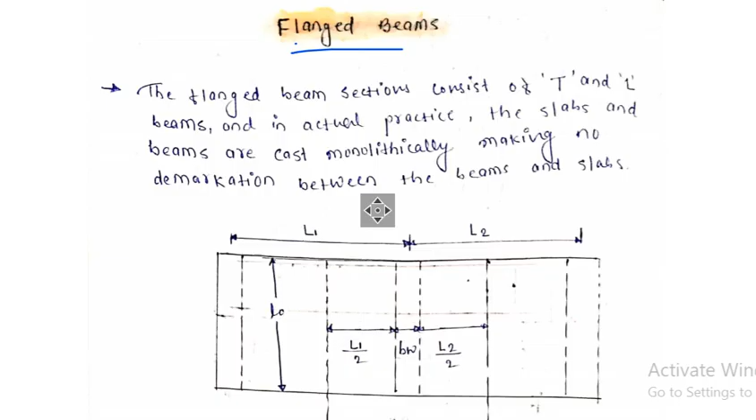So my dear friends, today we will discuss the flanged beam. We have already covered the singly reinforced, doubly reinforced beams and many more. If you have not gone through those, please go watch those videos so you can understand this concept clearly. So without wasting time, let's understand the flanged beam.

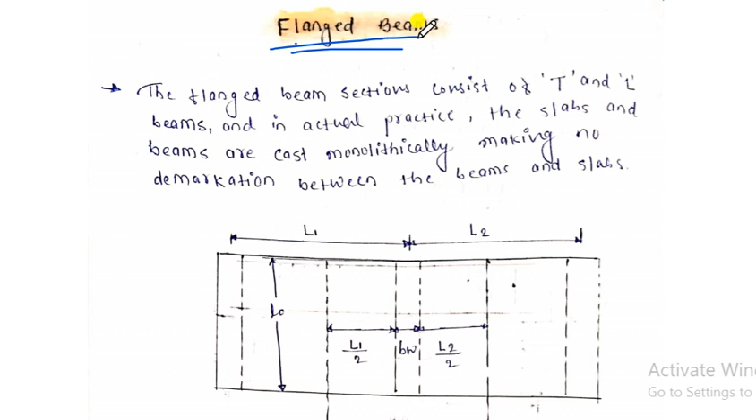Flanged beam - where does it occur? Does it really occur in structures? Yes, my dear friends, it does. So let me show you a figure so it can be easy to understand.

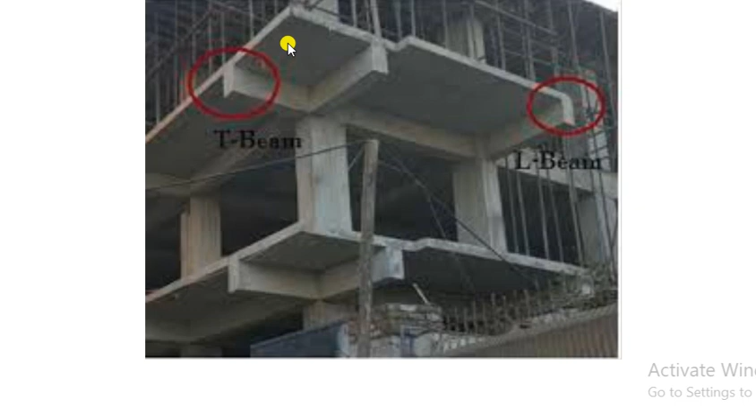At the same time, if you observe the slab at the corner, here the formation of an L beam takes place - L shape of beam. So this is nothing but what we call the flange type of beam. So the flange type of beam consists of T and L shapes.

Mostly the flange type of beam is of T and L type sections, and in actual practice the slabs and beams are constructed monolithically - tied to each other, or constructed jointly. Then there is no demarcation between the beams and slabs. That demarcation is nothing but the flanged beam. So, hope you understand the flange.

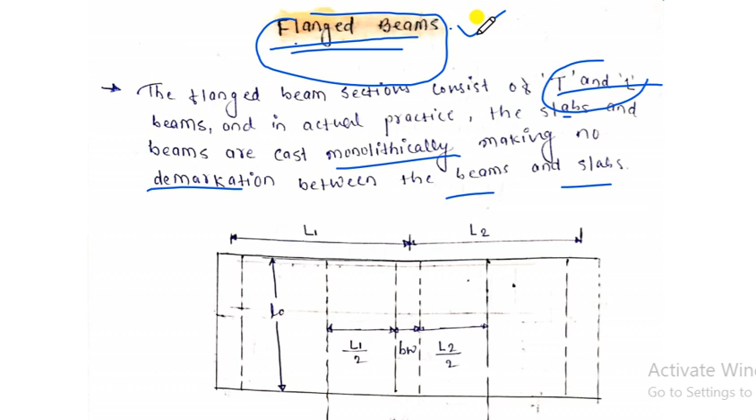So let's see the flanged beam more deeply so you can understand. My dear friends, assume this one is a slab - this is the top view. Suppose this is the top view of the slab - just imagine your slab. So this one is the top view of the slab, and this is the length of the slab, as well as the width of the slab.

Here we have provided a beam at the corners and at the mid span. There may be more beams as required, but for understanding purposes I have kept one beam at the corner, and this is the second beam. Similarly, this one is the last beam, the third beam. Hope you understand these figures - you can imagine these easily.

Yes, this figure which I have shown you is based on these concepts. This one is the upper portion of the slab, and this is the mid span beam. This one is the corner beam, and this one is also a corner beam. So here the formation is L shaped - this is known as L beam. Similarly, this one is known as T beam because it is in the form of T. Similarly, this one is also an L beam, and this one is the mid span beam.

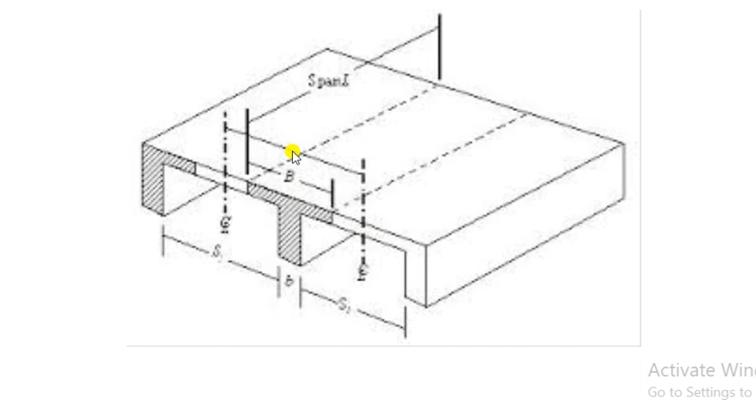So let's see once again. Hope you understand this one.

The length from center of these beams to the center of this beam is L1. Similarly, the center of this beam to the center of this one is L2.

The width of the web, this one is the web, that is bw. bw is nothing but the width of the web, so width of the web is this one.

At the same time, if you need to calculate this area, then it is nothing but L1 by 2. Similarly, this one is also L2 by 2 because the total is L2, so this portion will be L2 by 2.

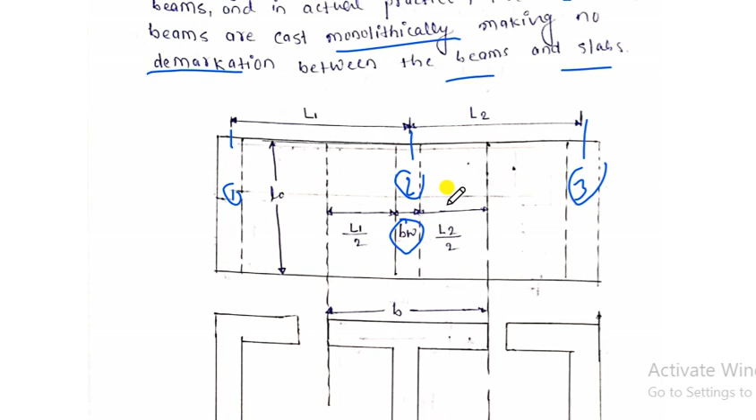So from these ones, I have shown you the figures like these. From these figures, as you can see, the formation of the middle beam, the intermediate beam form—

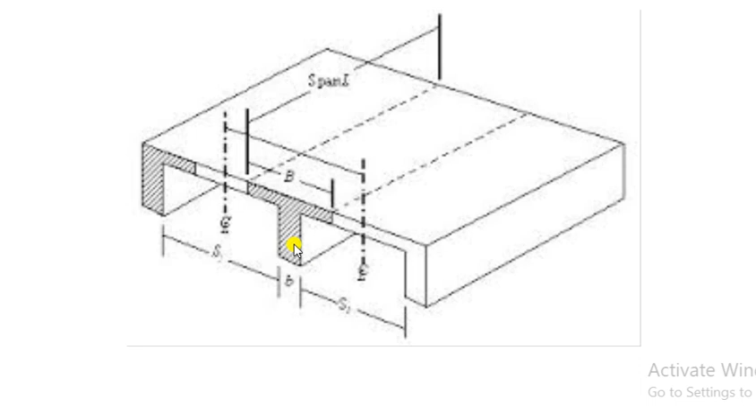Any intermediate beams, there may be multiple beams, that beam forms T sections, and the corner beam forms L section.

So that's why the mid span beam formation is T beam, its actual width is B, and this formation of the L beam, this one is L beam and the corner is also L beam. So this one's actual width is B.

So B is nothing but L1 by 2 plus this one, that is here to here is L1 by 2. Similarly this is BW and this one is L2 by 2. So B is equal to L1 by 2 plus BW plus L2 by 2.

But what happens in the flanged beam, actual width is not taken into consideration. Remember that point always, that actual width is not taken into consideration at any point, so we have to remember these points.

Always we have to take effective width of flange. This is why, because I will tell you the reasons. Let's understand this concept more deeply.

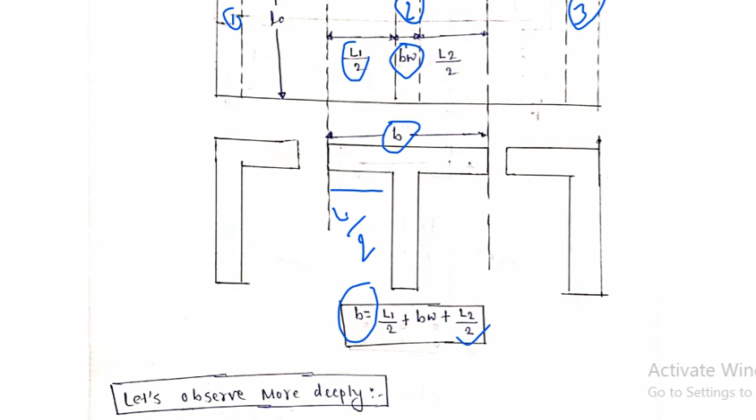Here as you can see, what I did, I have just drawn the above T section here. So the actual width, this one is B, and this one is web, that is BW. I have reinforced 3 numbers of bars at the bottom, and from the topmost fiber to the mid of the reinforcement is what we call effective depth, and this one is the gross depth.

So what happens, just imagine, suppose this one is a beam.

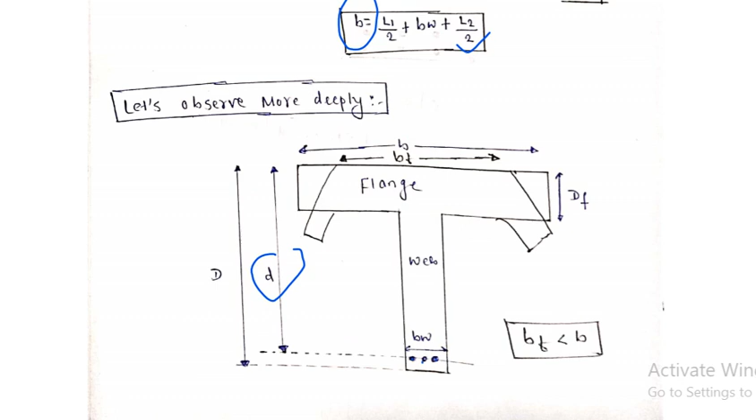So if it is a beam, if I applied the load here, if you applied heavy load here, then there is a chance of failure. Are you getting my point? There is a chance of failure.

So if I applied the load here at the corner, then there is a chance of failure because the support is not given here.

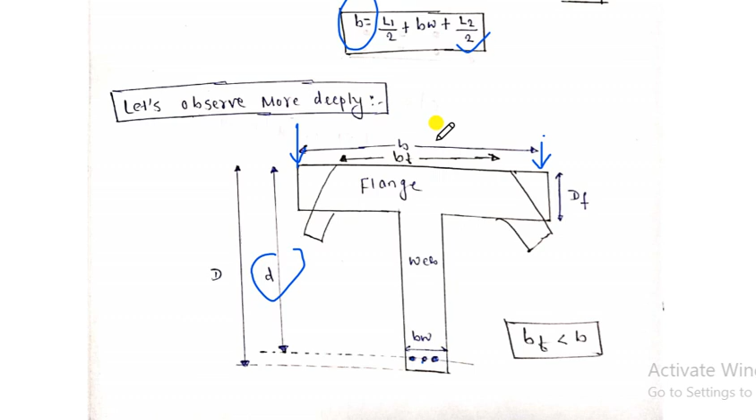So what we do is we neglect the actual width of the beam, and in order to prevent failure, we consider the effective width of beam. So in every design as well as analysis of the flanged beam, we must consider the effective width.

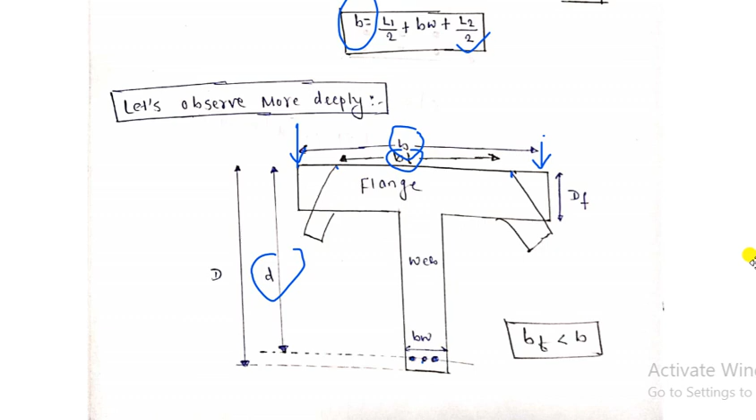Remember, effective width only. So what happens, the effective width is till here, to here. So if we consider effective width, there is less chance of failure. This is why we consider the effective width only in the T beam sections.

So from the IS code book 456, if you go to page number 37, there will be a formula given for the isolated T beam and for the continuous T beam. So for the isolated T beam, the effective width formula is LO by LO by B plus 4 plus BW.

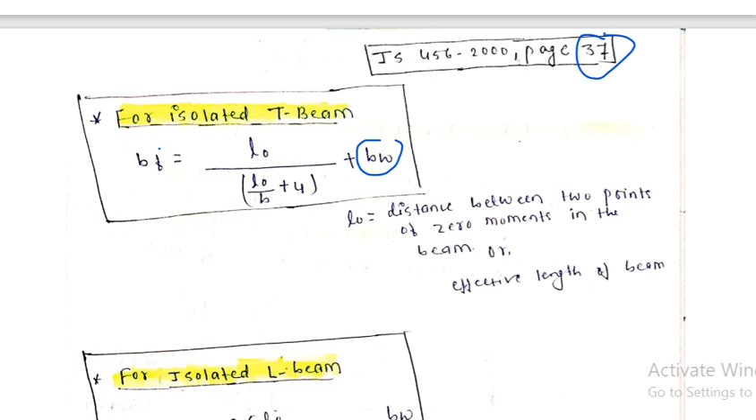Hope you know BW. BW is nothing but the width of web, this one, it is the width of web. So here the 4 is a constant and B is the actual width of flange. Here the LO is what?

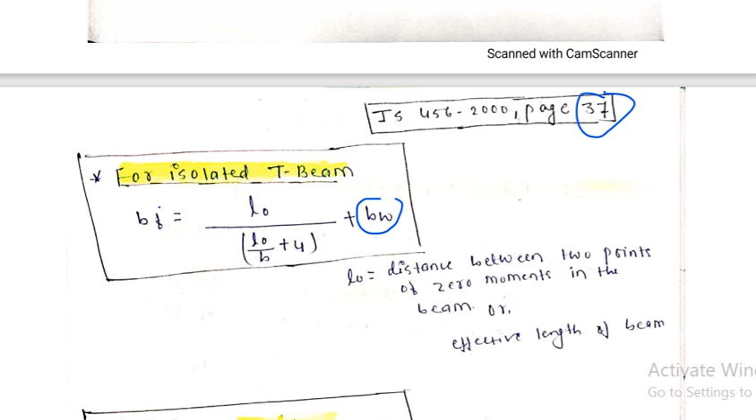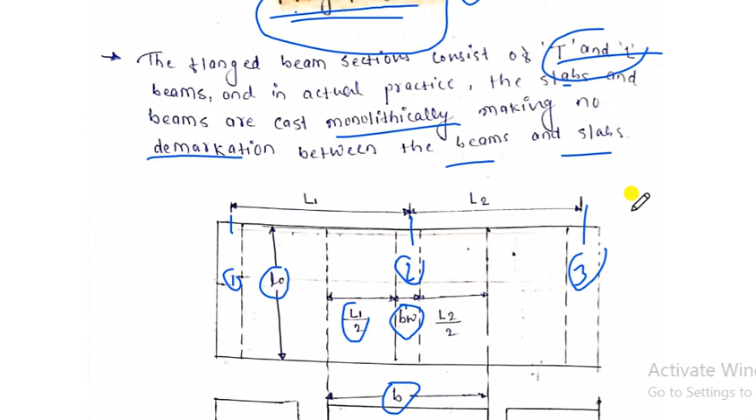LO is nothing but the effective length of beam. Let me show you the first figure so you can understand. These points from here to here, the mid-spans, is nothing but the LO, the effective length of the beam. So LO from the above figure can also be said as the distance between the points of zero moment in the beam.

And hope you know, as engineers you must know what do you mean by zero moment. You should have a clear concept about this.

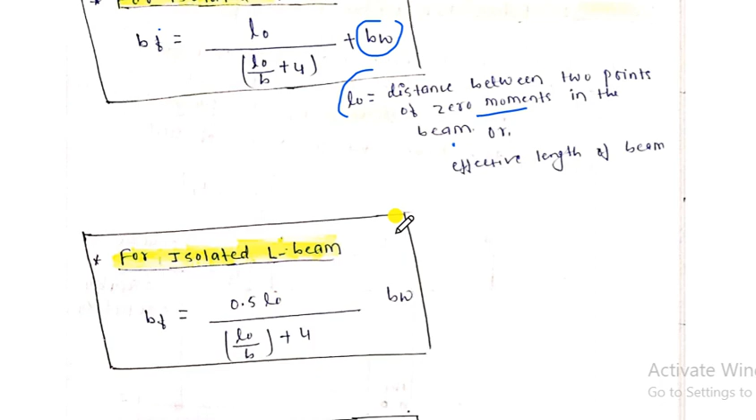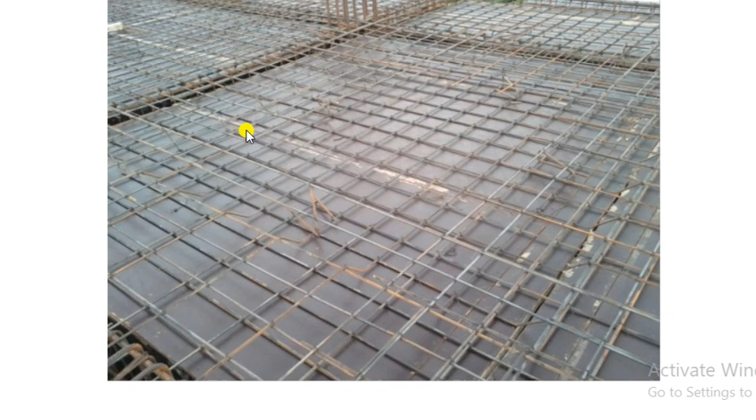So for the isolated T beam, let's understand what we mean by isolated T beam. Let me show you a figure from the side. This one is the beam, and this one is the slab. While concreting, we cast the slab and the beam at the same time, constructing both together. So this is called a flanged beam, or monolithic construction.

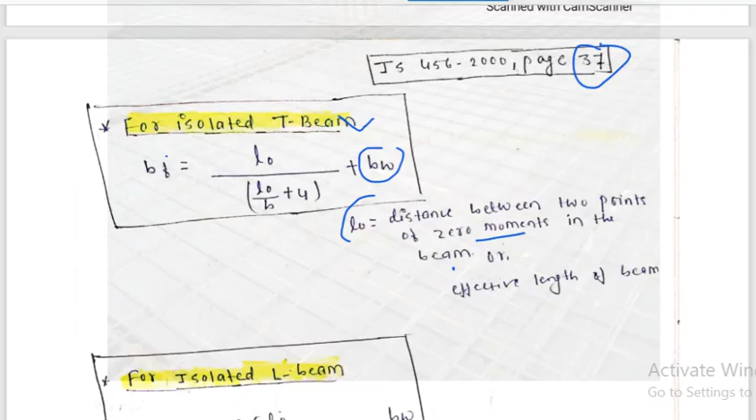But if we construct separately, we first cast the beam, and later we cast the slab, constructing them separately. Such a type of beam is known as isolated T beam, meaning the construction of slab and beam is done separately. So such type of beam is known as isolated beam.

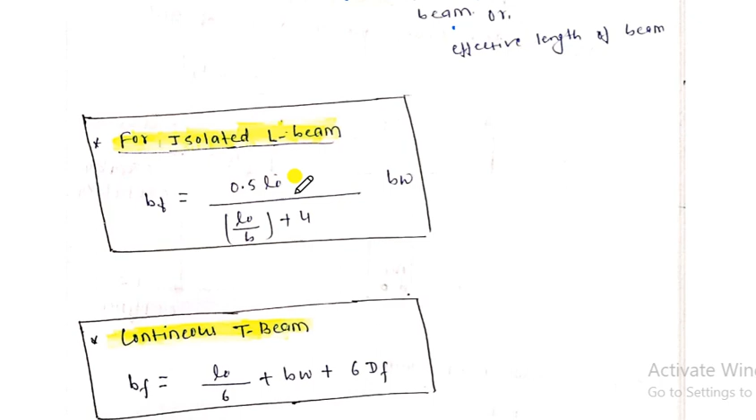And for the isolated L beam, it's just 0.5 LO, using the same formula: LO by B plus 4 BW, where BW is the width of the web, and LO is the effective length of the beam. For the continuous beam, it's LO by 6 plus BW plus 6 DF, where DF is the depth of flange.

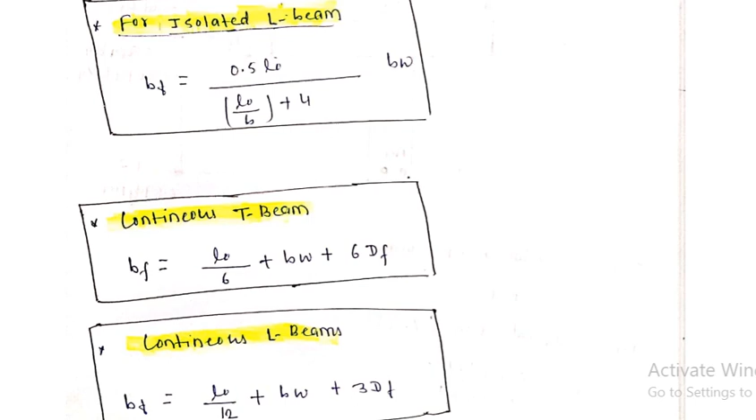So here, from here to here, is the depth of flange, that is DF, taken from this point. For the continuous L beam, it's LO by 12 plus BW plus 3 DF. All these formulas are given in the IS codebook 456 2000, on page number 37 itself.

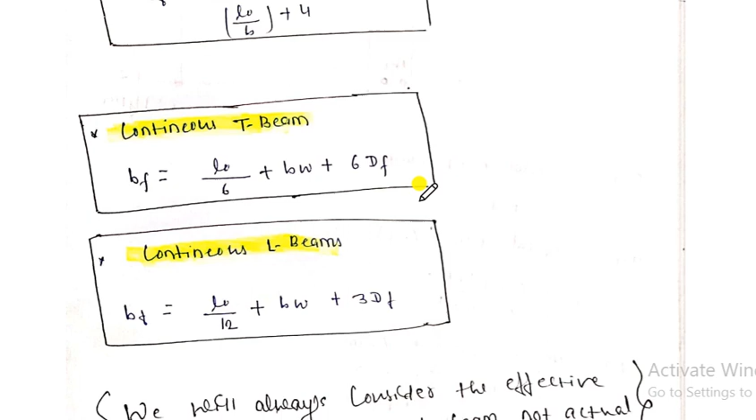So from these lectures, what I would like to convince you is that for the analysis as well as design of the flanged beam, we will always consider the effective width or effective length of the flange, not the actual width, because I have already told you the reasons behind it.

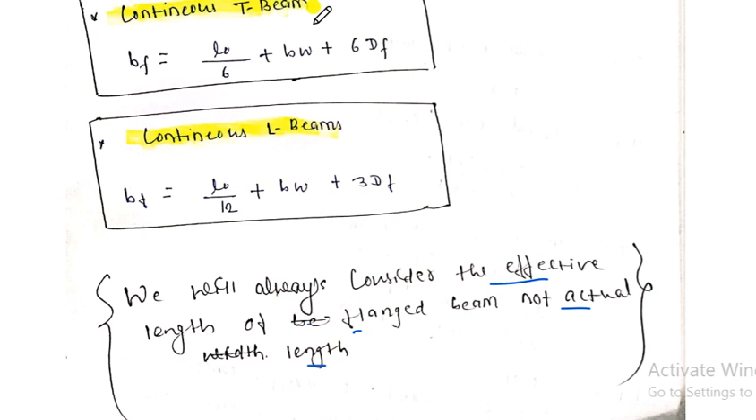Simply imagine if you make your hand straight, and if any load is given on your shoulder, then you can easily withstand it. But if the load is given away from the shoulder, continuously, what happens is your hand will deflect. Suppose this is you, and this is your hand. If I give you load on this point, on your palm, then you can't withstand the load, so it will deflect in this shape. So if I give you the load here, near the shoulder, you can withstand it easily.

So that's why, for preventing these deflections and failures, we always consider the effective width of the flange only.